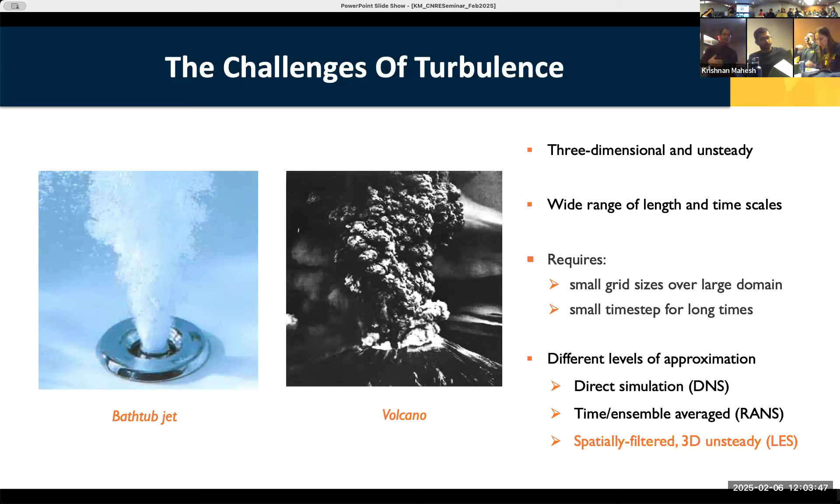Now, as the flows become higher Reynolds numbers, that's not practical. And so there is the approach called RANS, where you try to solve for the time or ensemble averaged flow. And the issue with that is now you need to model the unsteady effects of the turbulence. There is an intermediate approach called large eddy simulation, where your spatial grid resolves the large energy containing motions and your calculation is unsteady, but then you have to model the smaller scales. And so LES is what we are developing for complex multi-physics flows.

So what do simulations enable? What is the sort of overall objective? In a nutshell, we hope that simulations become reliable enough that they enable us to go from model scale to full scale. What do we mean by that? Well, the classical approach in engineering is to perform small scale experiments, right? Say water tunnel experiments, whose results we then take and scale to full scale. Now, if you look in the marine domain, the largest water tunnel that we have, there is a big LCC in Memphis. It's an order of magnitude smaller than a full scale something in the ocean.

Scaling is challenging as the physics gets complicated. For example, cavitation, right? Where liquid becomes vapor. Cavitation starts from nuclei, which are submicron. And then you go all the way to bubbles, which are say tens to hundreds of microns, from your model experiments to full scale. Now, when you go from a bathtub or your water tunnel out to the ocean, the size of the bubbles remains the same. The nuclei remain the same, but everything else is scaled up, which makes scaling difficult.

And so the question we ask is, can simulations assist, complement, replace some of this testing? And if yes, can simulations help us develop improved scaling laws? And for this to happen, the simulations need to be reliable.

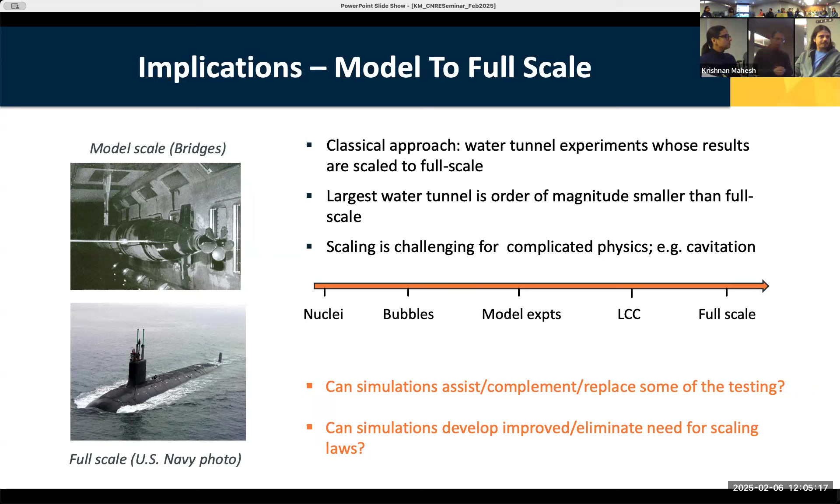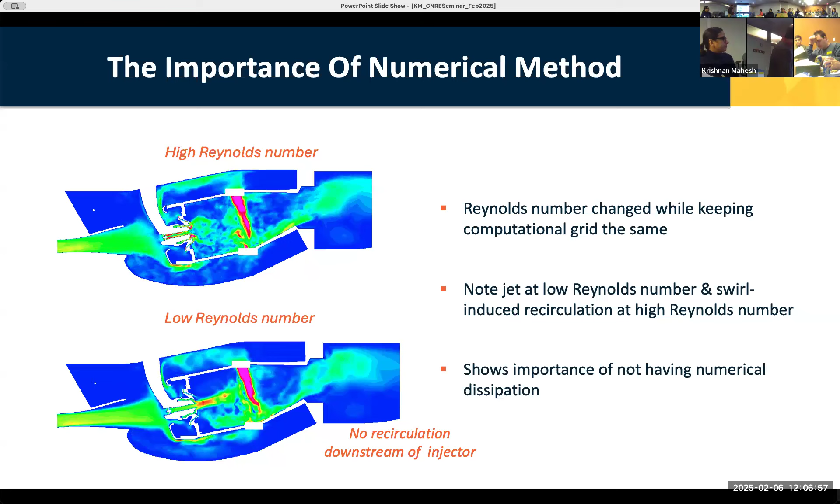Now, why make a production of this? So what is the point that we are making here? It is that at high Reynolds numbers on coarse grids, simulations can become unstable if the numerics are improper. And like I said, one might stabilize them by introducing numerical stabilization, but that can affect the result. So if you don't have dissipation, you become unstable. If you introduce it, the result changes. What then do you do?

So one way to address that problem is by developing methods which have the proper nonlinear properties. For incompressible flow, one such property is what's called discrete kinetic energy conservation. So what is meant by that is the following. If you took an incompressible flow, you conserve mass and you conserve momentum. The two automatically imply that you also conserve kinetic energy in the inviscid limit. And it's chain rule that gives you that property. But the thing is, discrete operators, numerical methods don't satisfy chain rule. So conserving mass and momentum doesn't automatically imply you conserve that.

Now, why is conserving kinetic energy important? Well, it's a quadratic quantity. So if you conserve that, then the stability of your solution is determined by what you do at the boundaries, which is something that you impose. And so the essence of it is, some years ago, we developed a numerical method that has that property of the governing equations on unstructured grids, which allow complex geometries to be represented. So that's been hugely enabling for us.

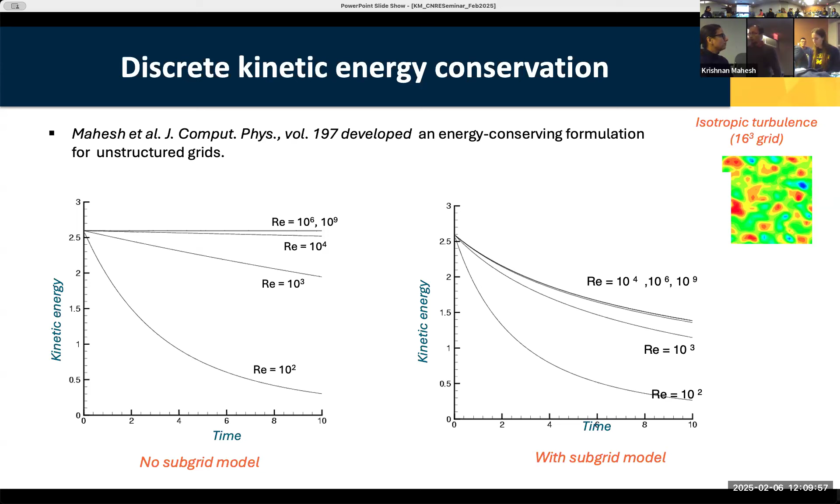So here on the same grid, you're turning on your model, and you see how the decay rate goes up, especially at the high Reynolds numbers. So your solution is seeing the effect of the model. And that's what you want. You want Reynolds number sensitivity, you want the solution to be sensitive to the model. If instead you have some numerical dissipation, then the solution will decay at a rate determined by the numerics and not the model. So this is what you get.

Now, why do you care about this problem? You care about it because when the vortex is stretched, the pressure in that core really drops. And when the pressure drops, that causes cavitation to incept. And that's what you care to predict. And so the implication is, when you try to do this problem, if your mesh is not fine enough to resolve that vortex core when it's being stretched, your solution is going to say, hey, there's no cavitation occurring here.

Well, the experiment is telling you, no, there is. So this is a scenario where the important thing, the thing you really care about, is happening at very, very small scales that become impractical to resolve even with a numerical method that you like. And so your solution strategy has to be one of modeling that subgrid scale, low pressure events that trigger inception. And I'll touch upon that later. So these are sort of the three main points that I wanted to make here.

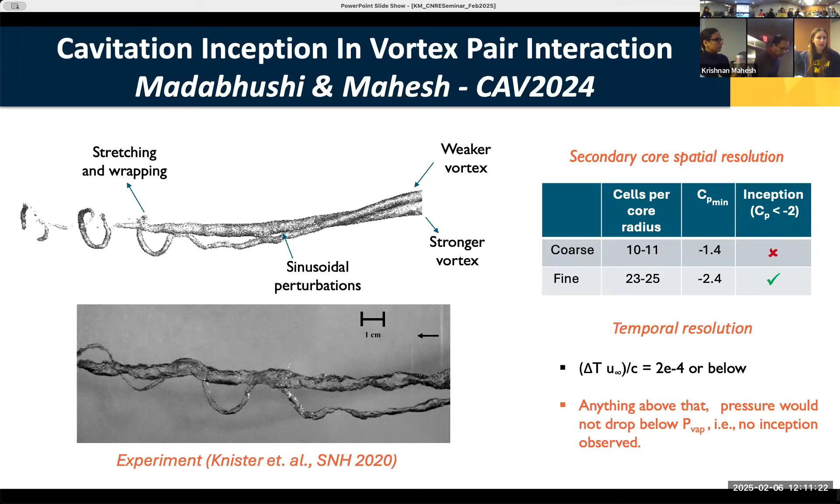We are interested in solving flow over things that move. And so we've developed in recent times, these two papers here describe the details, a methodology for moving bodies, multiple moving bodies. It's called unstructured overset. Unstructured allows you to do complex geometries. Your elements can be arbitrary. And overset refers to basically solving for the flow on a number of meshes that can move.

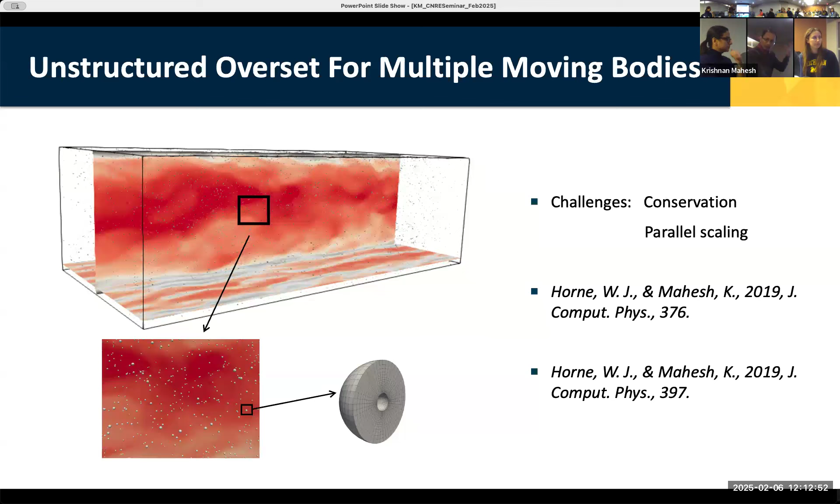And the significant challenges there have to do with numerical conservation. How do you conserve mass, momentum, have these energy conserving properties on all these different grids? And the second is parallel scaling. As the number of meshes and so on increases, are you effectively making use of multiple processors? And so these techniques had to be developed, and solutions are developed in those two papers, using ideas drawn from things ranging from techniques used in video games, for example, to handle how things are cut and so on. And that resulted in this methodology. And so in today's talk, I'll show you some results from this sort of a capability.

You saw many particles. I just wanted to show you one example that illustrates the detail that Wyatt paid attention to in developing this capability. So this is an example where you have one particle. It's dropping, and then you see it rebound from the bottom wall. You can imagine, right? If I just took a particle and dropped it on the wall, the pressure is going to increase beneath it. It's going to squeeze fluid out, and that's going to slow it down, then it's going to impact, and then keep bouncing. And because there's viscosity there, you're going to have a restitution. Every successive bounce is going to be smaller.

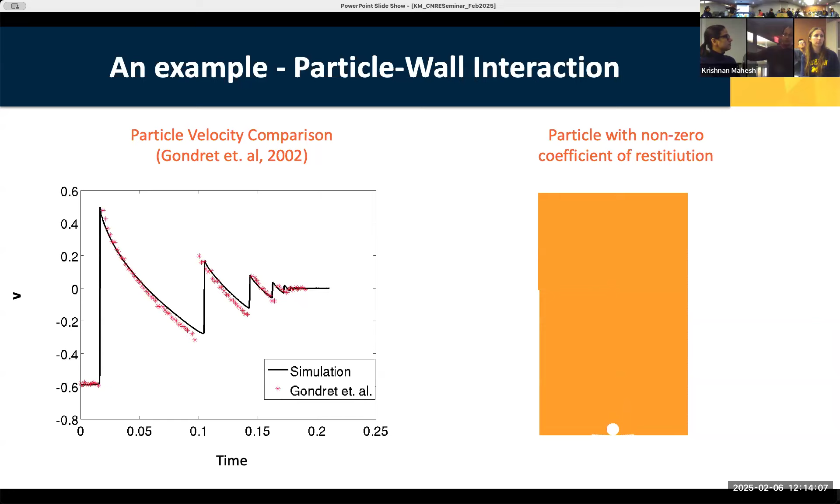Now on this body, you see this little line here. Zoom in. This is what it is. It's a tripwire. Tripwires are used in experiments to try and get the flow to go turbulent, so that the flow is representative of what happens at higher Reynolds numbers. It's been known that tripwires can affect the flow, and depending on the range, it's not always clear what they're doing to the flow. Now we are in a position to resolve the tripwire using the computational grid, and eliminate it as a source of uncertainty when we compare and when we scale our results. And that really is what is shown here.

This here shows you one comparison of the results. These two papers by Nick describe these results, describe the simulations. It just shows you how the pressure along the hull between simulation and experiment matches. And so what are these results good for?

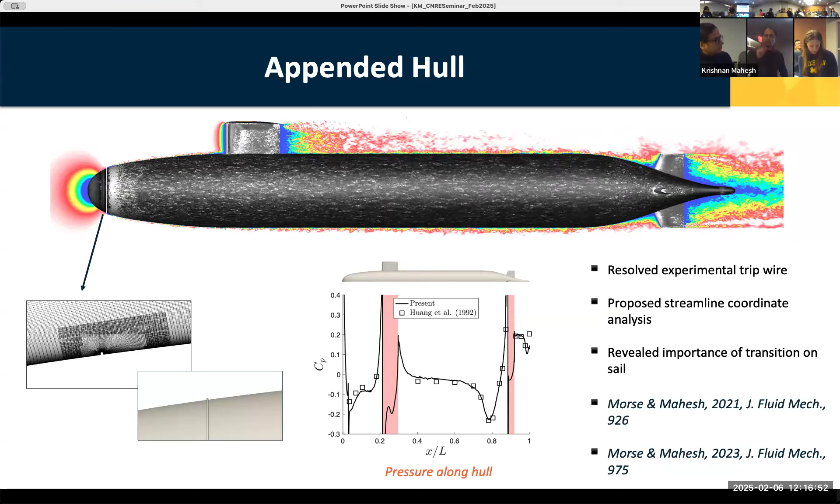Another thing I draw your attention to is you see the flow on the sail looks like it's going from laminar to turbulent. That's transition on the sail. And one of the things we learned here is that transition on the sail is important. I just wanted to show you that one result here. The experiments that we were comparing to had a bunch of pressure taps on the sail. That's what the P1, P2 is, right? And so we compared our results to the experiment at each of those taps.

So if you look at any one figure like this, this is the pressure, Cp as a function of x over c along this purple line. The experiments are the symbols. The solid line is us, where we just computed the flow. And the dashed red line is us, where we tripped the solution on the appendages as done experimentally. Now, this is one station; I'll show you a second and then some more.

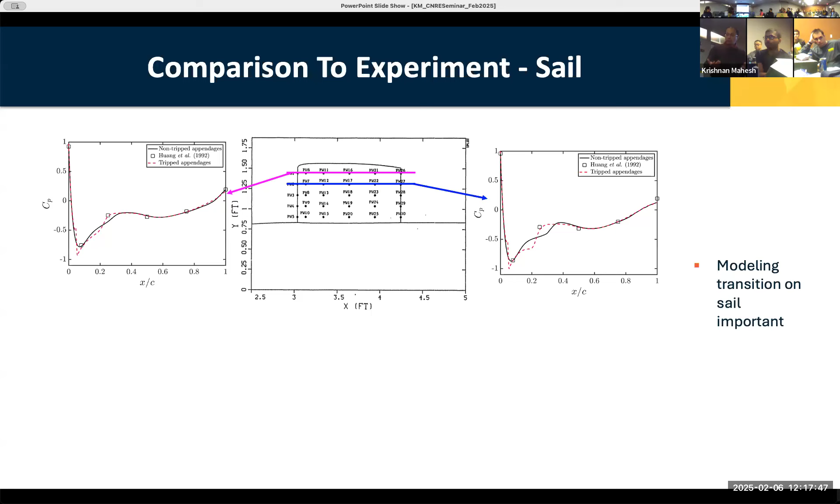When you first got these results, it was tempting to say, that's good enough. But then you look at all the stations, look at the third, look at the fourth. It looks like there is something systemic in terms of the deviation. And what we found is that when we trip the flow, the pressure goes basically through that tap, not just at one station, but throughout.

So tripping on the sail is important. And the reason is the sail is smaller. So even though the Reynolds number based on length is larger, the Reynolds number is lower. And so you expect that sort of a thing. So these are the sorts of things that we can now do.

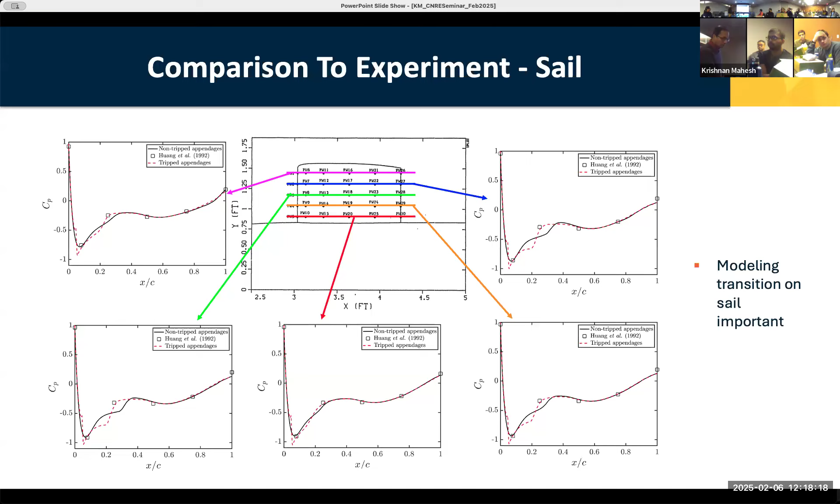I wanted to show you a couple of results on the application of this capability to what's called a prolate spheroid. It's a model for the hull of the body. Right now there's a big experiment being planned that Ellie knows a lot about. Anyone who's interested, talk to her about the experiments. They're really cool experiments of a really large spheroid that's going to be tested in the LCC. And the instrumentation on it is really wild.

And so LES is at a point where it's considered reliable enough to work with the experimentalists in the planning of things. LES was used to inform trip design in these HIPRO experiments: how do we trip the flow at angle of attack, and so on and so forth. Now, while that was going on, in parallel, we were performing simulations of experiments that were done much earlier in the Simpson group.

And these are results from those simulations. A couple of things that I wanted to point out. You see what looks like a ring here? It's actually 238 posts that those experiments had used. And because of the overset approach, we are able to attach grids to each of those posts and just resolve the flow. So if you don't agree with the experiment, at least it's not because you didn't resolve the tripping geometry.

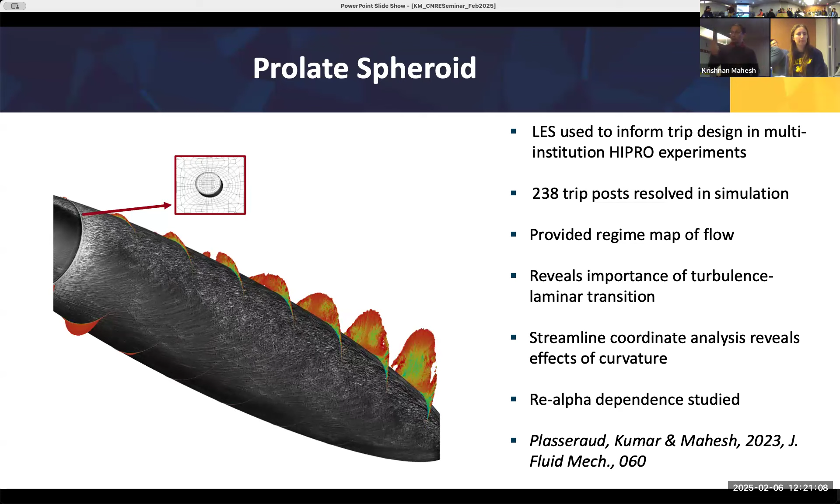And again, this was another problem. Again, look at it in streamline coordinates, seems more intuitive, easier to think about. And we looked at the span of the effect of Reynolds number and angle of attack. This is at 20 degrees. We varied the angle of attack to say, hey, how does the flow change? For the same angle of attack, we vary the Reynolds number. How do things change? And the flow is amazingly rich. And I just want to share a couple of results with you on that.

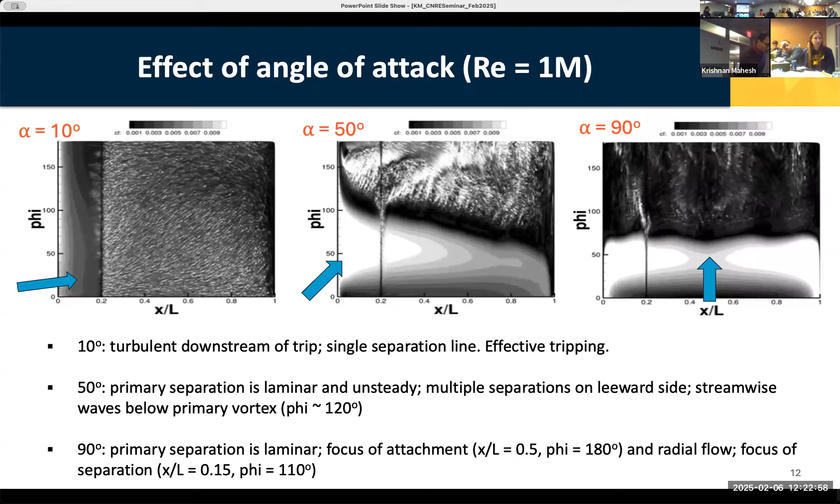So why these things happen is a source of huge interest to us. How does a transition occur from one regime to another? Are there regimes? There are experiments that show when you have those big vortices on either side, they can be asymmetric. So they form on one side and then they just want to stay on one side. And that's a huge deal, right?

You can imagine if you make a big vortex to one side, your loads are all pushing in one direction. That's a problem. Why does it happen? When does it happen? Why do these waves form? Can we take this data? Can we take measurements away from the wall and assimilate, predict what's happening near it?

And then think about future pressure fluctuations, right? What is their nature? Skin friction, what is their nature? What are materials of the surface? What are they going to look like? And we do little things near the separation points and so on to change the topology of the flow. So thinking of all of these things in the context of this flow is how we're thinking about it.

And this thing is stationary. You don't just stand still in the ocean, you move. So once you start moving, now you have unsteadiness in the mean, and that changes everything, right? Even more. So that's the richness of this problem that we're hoping to look at down the road here.

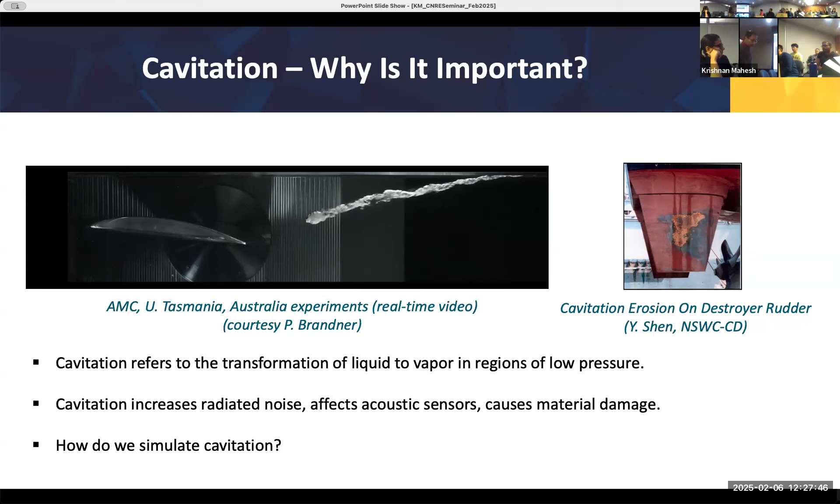Imagine this happening behind a propeller when you're underwater. Something you would not like to happen. Now, when the cavitation is large, it can cause coatings and so on to erode. That's what's happening on the right-hand side. So these are the two reasons to care about it. So the question is, can we simulate cavitation and use it to predict and hopefully control or design for these things? I want to share a couple of examples in both the inception and erosion regimes. The first has to do with cavitation inception in ducted propulsors.

Okay. Now, what you care about in this problem is inception in these ducted propulsors. At what free stream pressure do you start hearing noise? Does inception occur? That's the engineering problem. And there's past experimental work on this which shows, as known from experiments and propeller designers, that the tip vortex is weaker in ducted propulsors compared to the open prop.

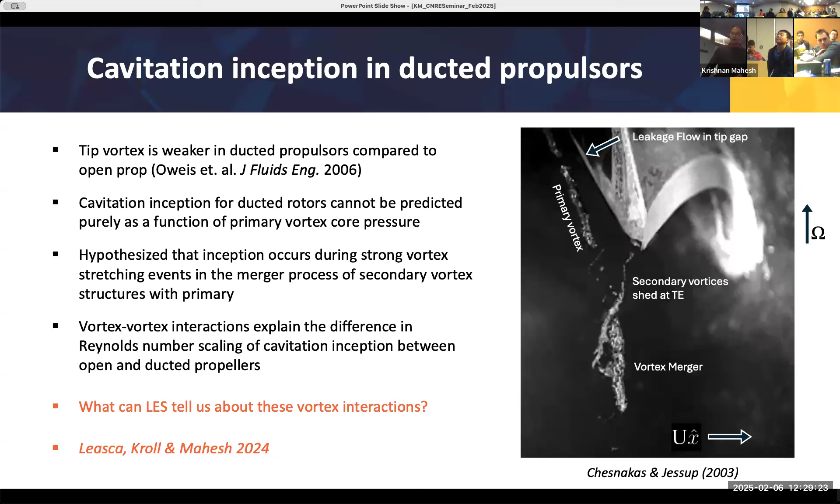And furthermore, when it comes to predicting inception in these ducted propulsors, the inception is due to the interaction between these vortices, and cannot just be predicted in terms of the strength of the primary vortex. So the question is, can we get these interactions right to get the scaling right from small model to full scale? And the question we ask is, can LES predict this problem? And if so, can it guide us towards predicting scaling of inception of this problem?

And so the first is that LES provides some insight into the tip gap details. One of those insights is that the interaction isn't just between one primary vortex and one trailing edge vortex. Instead, the blade sheds vorticity through a number of fine scale, counter-rotating vortices that interact with the primary vortex.

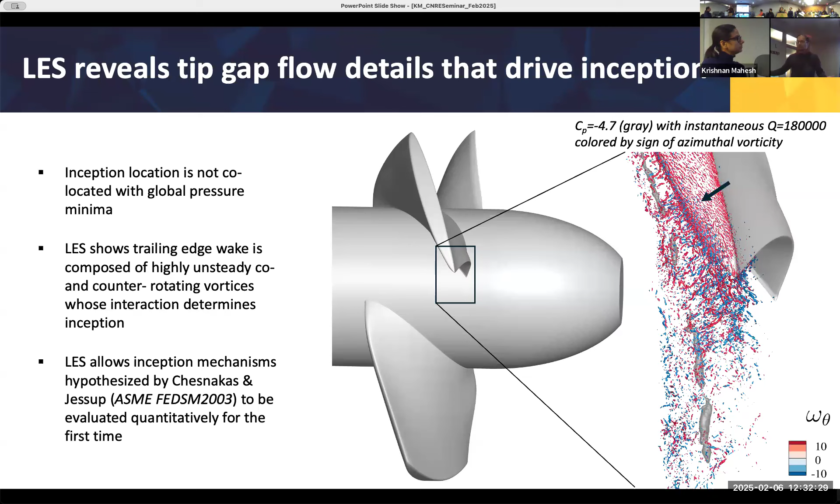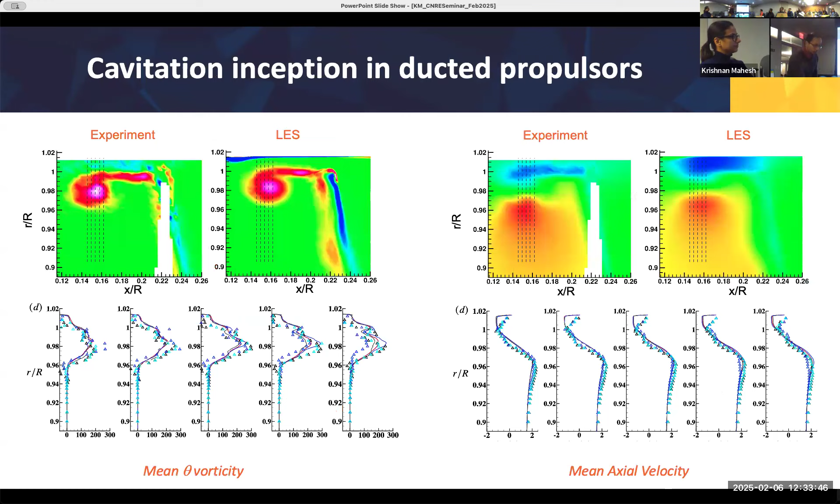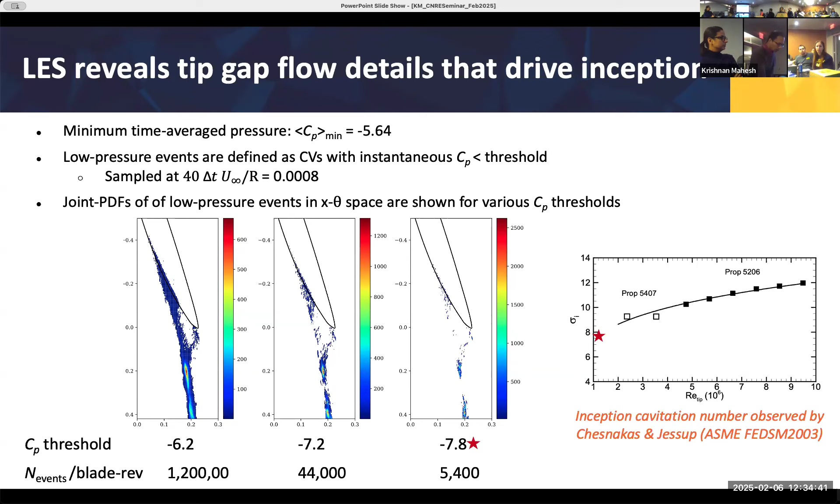Okay. Now, we said earlier that when you have cavitation occurring, it occurs in small regions for very small instances of time. And if your mesh isn't fine enough to resolve those small regions, you're not going to get the pressures that are low enough for cavitation to occur. What do you do? Now you've got to model explicitly the subgrid scale low pressure events such that you get cavitation. And so that's work that we're doing.

And I'll show you results in the context of a problem which has been experimentally studied here at Michigan, where you have two hydrofoils that produce these stiff vortices that interact, right? And in the region of interaction where the weaker one is really stretched, that's where your pressure is lowest. And you'd like to compute this flow. So imagine trying to compute this. How might you do it?

You go, oh, the experiment shows me inception. I'm not seeing it. Well, I'll keep refining my mesh till I see it. We did that, right? Then you go, okay, now I get it. I agree with the experiment. But now I'd like to compute it on meshes that are maybe 10 times smaller, 20 times smaller. How do I do it? How do I model it? That's exactly what we've done.

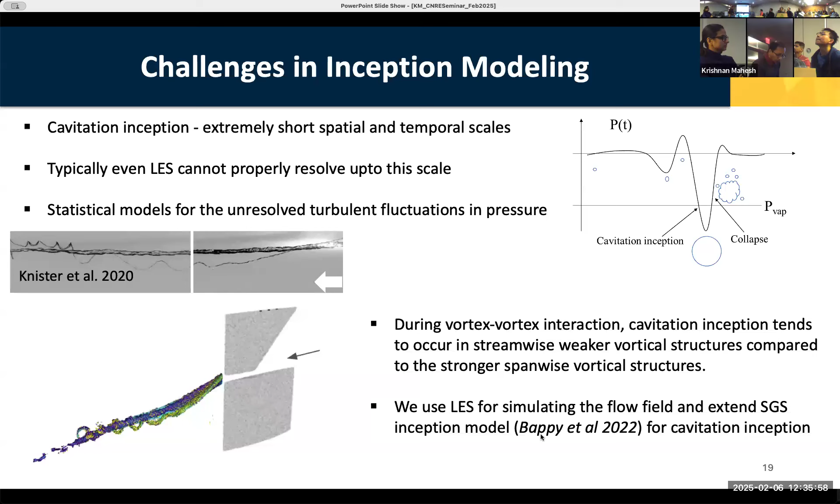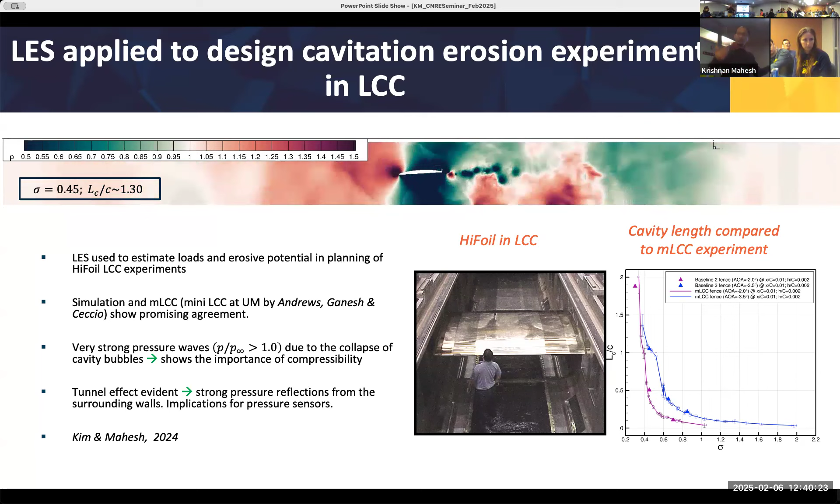Now, these experiments don't have volume fraction measurements right now. So to get further insight into this regime of the flow, we said, okay, let's look at a hydrofoil configuration for which there is more detailed data, things done on a smaller scale, because the LCC is large, you can't do all these experiments. And so there were experiments done here

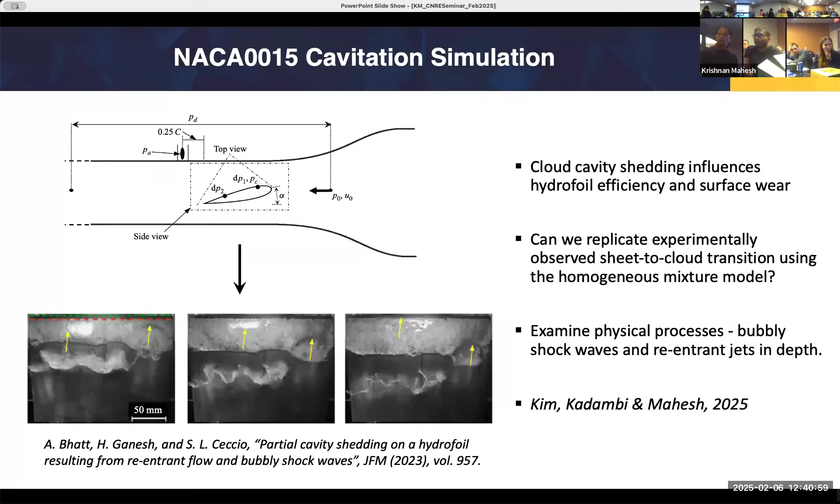in Michigan, where they looked at a NACA 0015 and got it to go into this very erosive regime. Can we predict it? What do we get? What do we understand? So Sungnam is doing that sort of work. And so I'll show you results at an angle of attack of 10 degrees. Imagine dropping the free stream pressure at a 10-degree foil for the NACA 0015 in the same conditions as this experiment.

So this is now a higher pressure, sigma is 2.6, just think of it that way. The white that you're looking at is an isocontour of vapor. The more white you have, the larger the regions covered by vapor. So you see a sheet of vapor form near the leading edge on the suction side, the suction peak, right? And then it rolls up into a cloud and then collapses. On the vertical plane, you have pressure, and again, you see its intensity, right?

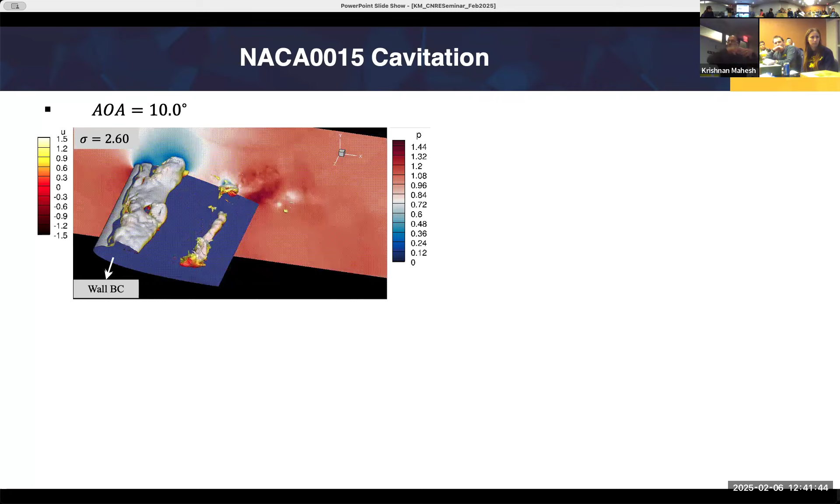As small pockets form and larger small pockets form and collapse and so on and so forth. Here is what happens when you drop the pressure. The region of vapor increases. Drop it some more, region of vapor increases some more, right? So the cavity length effectively increases.

Now, what you can do is to time average your vapor volume fraction, and from it extract a cavity length, right? That's what's done here. And then we compare our cavity length to what was measured in that experiment. The crosses are the LES results as they stand. The statistics are still being gathered. So these are results in progress, and it's encouraging.

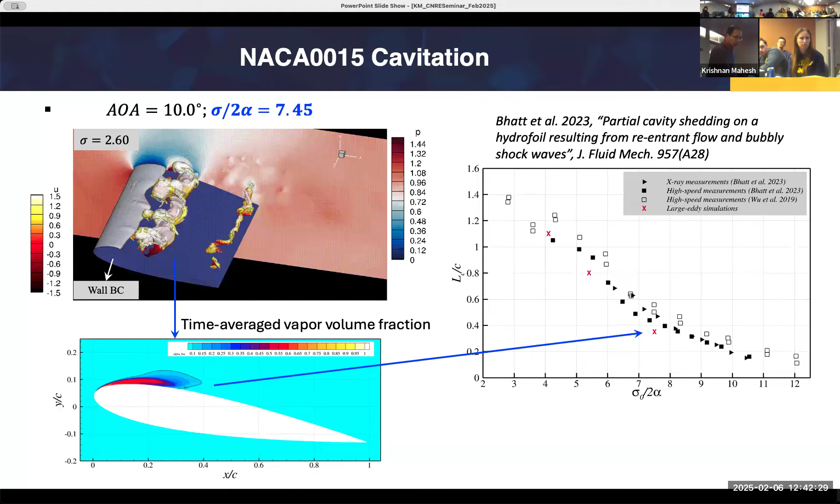Okay, the symbols in black are the experimental data, versus the crosses. The x-axis is pressure. Okay, and that's really what's shown here. The agreement of the three crosses with the data is, so cavity length seems to agree reasonably. And on this slide, I want to say, okay, what is the LES good for? What does it provide? Okay, you agree for cavity length, what does it give you?

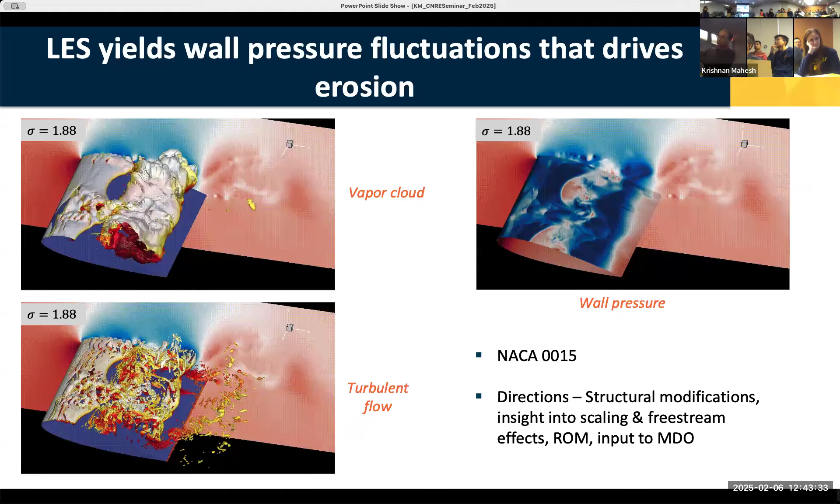And the figure on the right is really what is useful information, because it gives you wall pressure on the surface of the airfoil. Because if you have this data and if it's reliable, then you can use this. This feeds into trying and predicting the pitting, right? Because this is the forcing function for the structural damage. So that takes us into those future directions down the road. So that's the reason for doing these things.

And so it raises this thing, is it there? It raises the interesting possibility that there are higher tones also. But so far, the agreement for what we are comparing and what's available is encouraging. And this is where we are in the process, okay?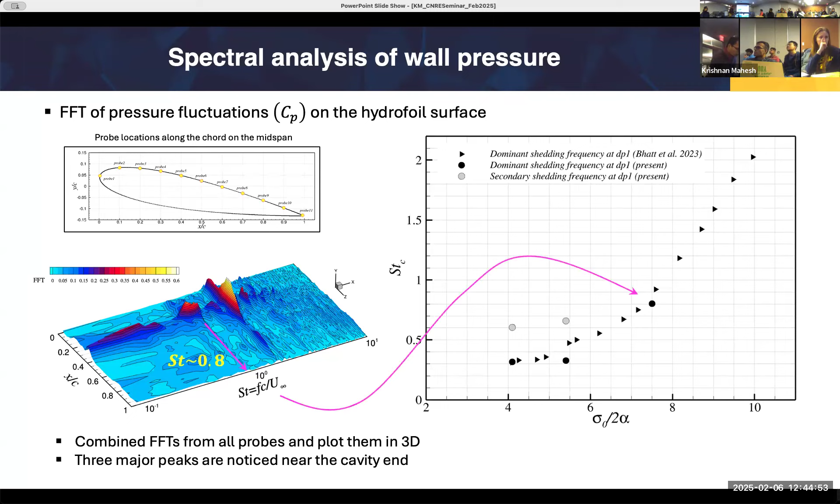That is, if you had water going over a surface like this, now instead of water being in contact with the surface, you have air, right? You have gas in contact. So can the drag go down? That's the promise of it. And so what we've developed in our group is the following. Given a realistic superhydrophobic surface, if you can scan it and give us that geometry, we can, using free energy principles, calculate the shape of that complicated interface. That was done in this paper by Kareem and company.

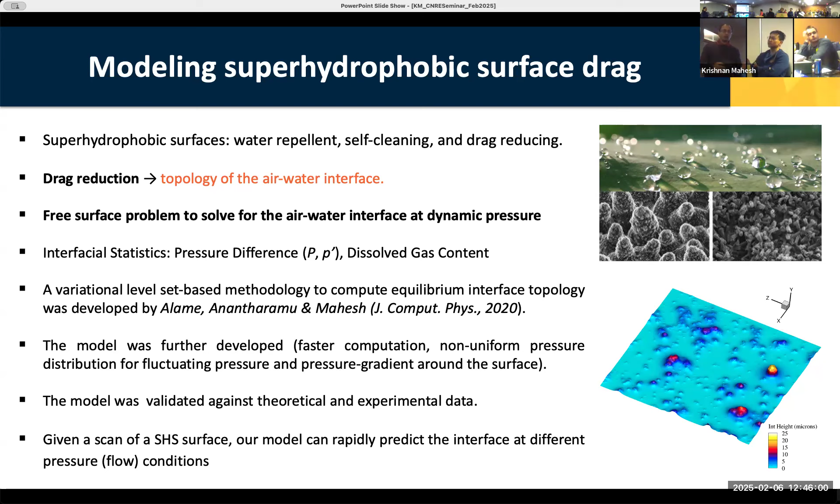And we've recently extended that capability to say, if I now know the shape of that interface, can I model the drag that surface would cause, right? And Mehdi has done that. And I wanted to show you one slide on that. And here is the insight that came out of that work, which is that current literature, when it says how do superhydrophobics work, they try to correlate drag reduction to one parameter.

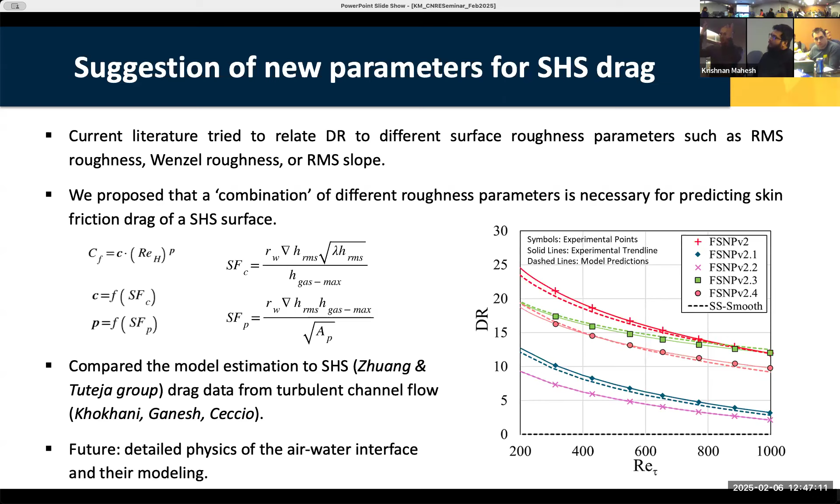So the future thing is, if I now zoom right to the surface, what are the turbulent details of the flow that happen near the surface? That's the direction that we're thinking. So superhydrophobic surfaces are one example of next generation surfaces, as we want to call them.

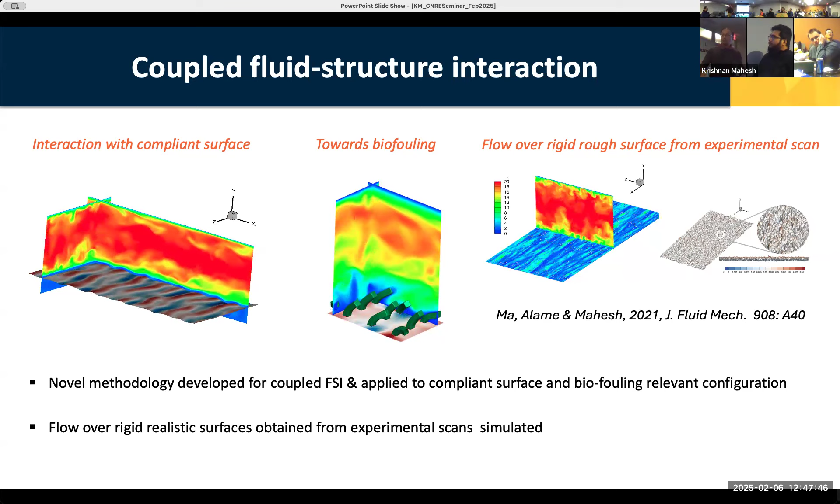But another example of dynamic surfaces that we care about has to do with biofouling. We are working on developing the capability to do coupled fluid structure interaction to understand things like compliant surfaces, coatings and other things that are compliant and relevant to biofouling. You have things that grow on a surface. They're soft, they respond to the flow, the flow affects them, they affect the flow. And how do you develop methods to predict these things?

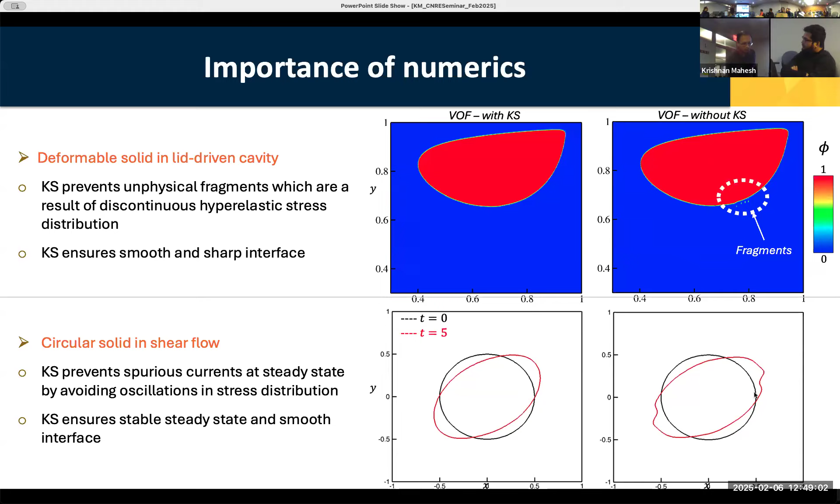And the thing on the bottom is just a circle. You're shearing it, it becomes an ellipse. Numerics are the difference between getting an ellipse and getting something that looks like that, on the right. So I just wanted to share this with you, and show you a couple of results.

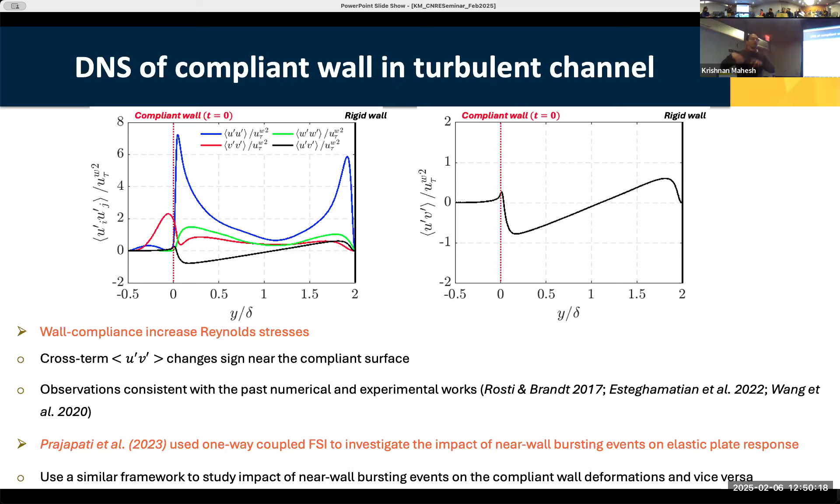So what do you do with this? We can now ask questions like, how does the structure of the flow affect the near wall perturbation in a dynamic sense as a function of frequency, and how does that affect sound? We've developed that way of analysis for one-way coupled things, and so now the idea is to go forward and answer questions like that in this two-way coupled framework. So I just wanted to share that as an example.

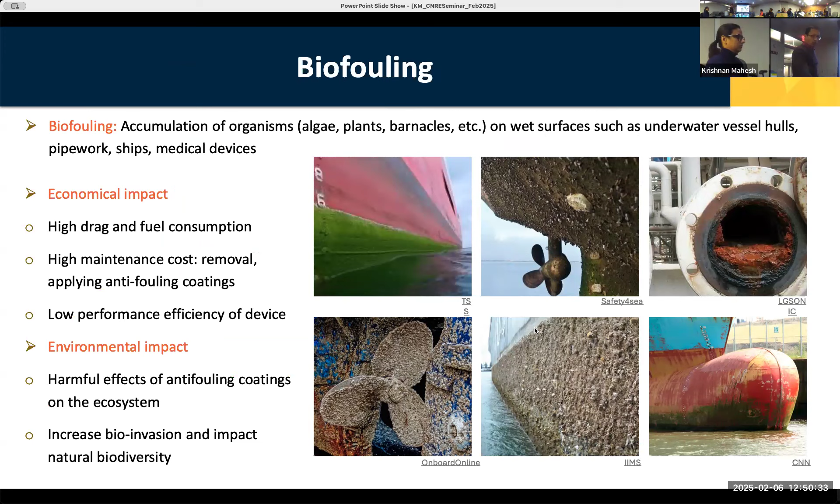And then biofouling, as I said, is another problem that we're actively working on. There's work going on in Harish Ganesh's group, so we are aligning with that. And the idea is the following: to use numerical tools to look at the dynamic interaction of biofouling, right? That's from Parth and Harish's experiments, and allow us to answer questions like these.

How do element shape, material properties, distribution density affect how they interact, how do we model it more accurately? How does a substrate on which these things grow affect the interaction, and how does all of this impact drag and so on, right? And simulations like this, I just want to leave you with that. If simulations like this are reliable, you have information on things like near-wall pressure and vorticity and so on and so forth.

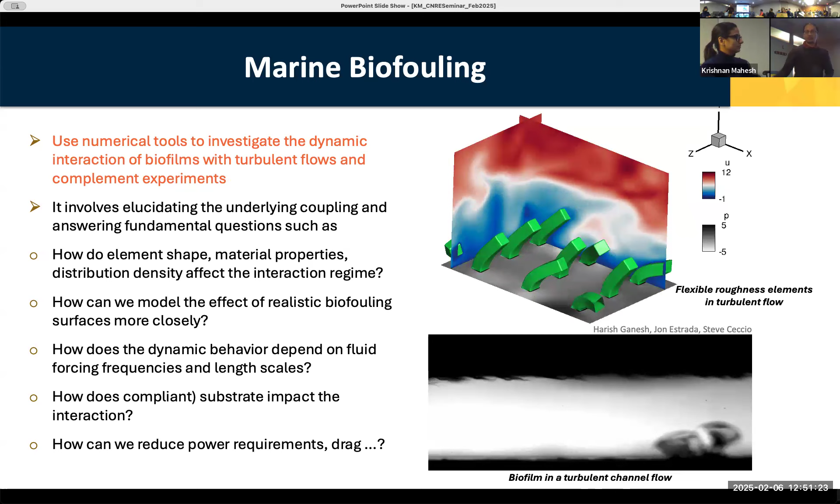Right. The key question is, well, can you believe what you're computing is the thing? And so that's the development aspect of things. But the potential of it is significant as we move forward. And this is the last part of my talk. So you perform simulations, you have experiments. We talked about how you collaborate, right, and assist each other.

Now, another way in which you can integrate them is, can you integrate simulation data with experimental data? Why would you want to do that? Well, one possibility is use the experimental data to improve your predictions in real time. The other possibility is use the simulation data to predict things that the experiments that you have are not predicting. For example, something right now that is of interest to us.

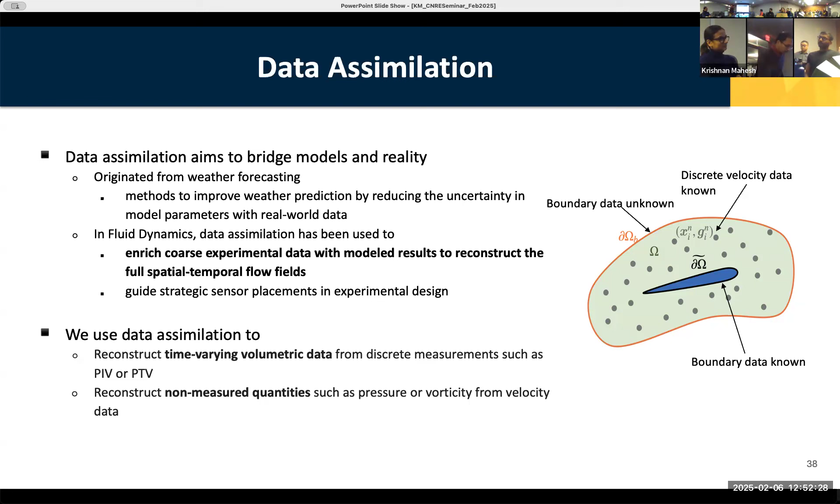We're exploring two approaches. One is what's called an adjoint approach that Gary is working on. And essentially what you do is the following. You solve a gradient-based optimization problem. So we all know least squares fitting, right? If you have data, you can fit a curve. Okay, so imagine having the experimental data here. So the actual values of velocity, whatever is being measured, is one constraint. You would like whatever you're fitting to be close to it.

But whatever you're fitting should also satisfy the Navier-Stokes equations. So they act as constraints. So you want to combine everything and obtain a continuous field on your numerical grid that satisfies those two constraints, right? That's the essence of it. And it's a lot easier to say it than it is to do it. So what we are optimizing is, if I have this data, what are the values of the boundary? What are the initial conditions that give that prediction correctly? That involves adjoints. There's a cost in terms of how you do it and so on and so forth.

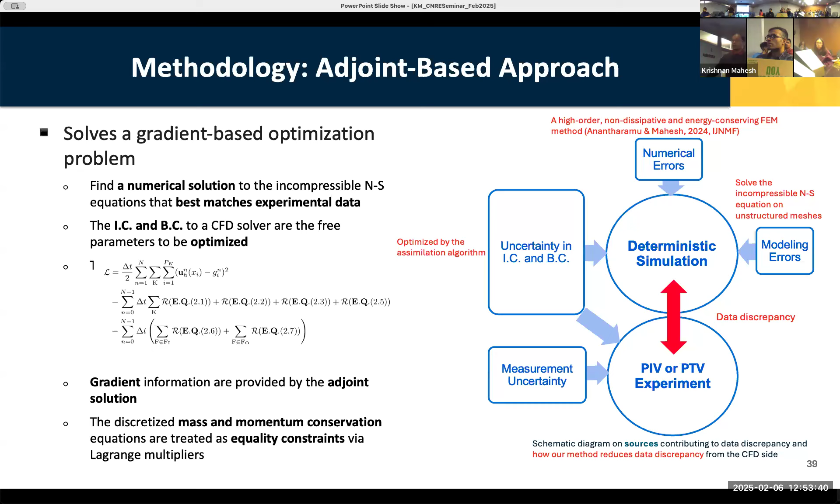So right now, Gary's developed the approach, the algorithm to do it, and we are developing the codes to scale it up to larger problems. So then we would have a method to work with PTV data that gives you pressure, vorticity, and so on from the data. And Shenzhang is exploring PINNs, or machine learning, to do the same thing. In the PINNs approach, again, you have the data and you have some physical constraints that come from your model. You don't solve an adjoint problem, but through a process of training, you get the predicted data to match what is given, and that becomes your model, right?

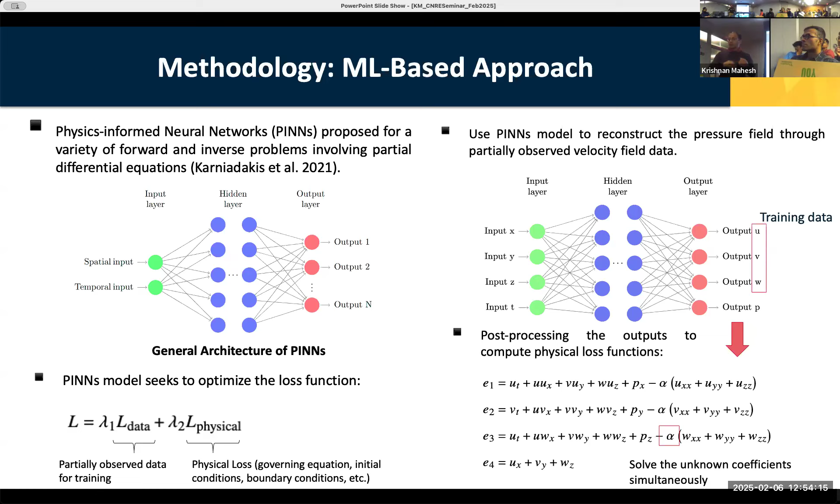So how does it work compared to adjoint? Is there a hybrid that's possible that makes things better? That's what we'd like to explore. Those are the research questions for us in the context of this problem. So just to show you a couple of results in the adjoint-based approach.

This is a field of turbulence. That red square is where you're extracting data. The blue are the points where you're extracting data. On the bottom, your assimilation approach is recreating data in that subvolume. So whatever is inside the red on the bottom should look like the red on the top, essentially. Okay, and the machinery that we have allows us to calculate things like the error and so on and so forth.

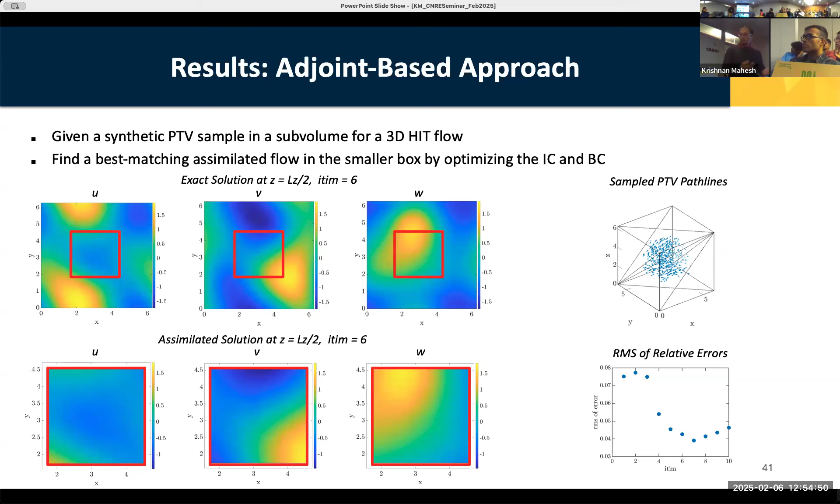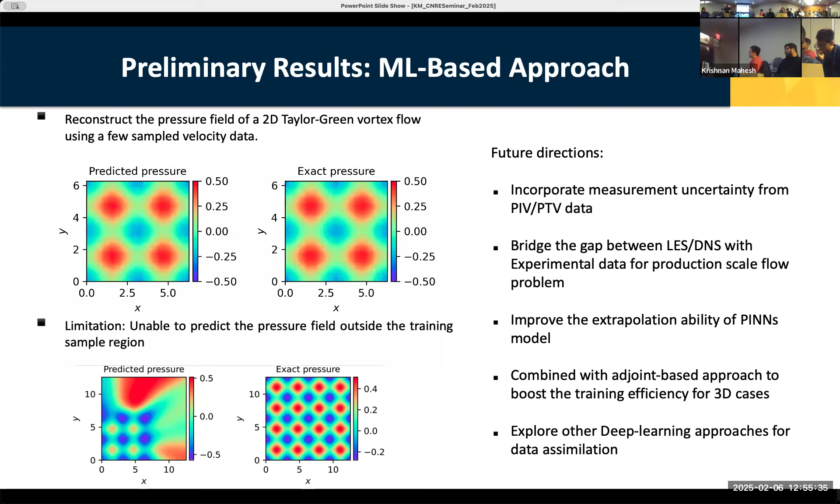Now we are trying to push it to understand its limitations, which is going outside the range that you have. One way to think of it is in parameter space, but you can also think in terms of spatial location, right? You trained on a sub-volume, you try to predict a larger volume, you don't get it right. And so future directions are to understand and develop both adjoint and machine learning approaches to develop that kind of framework where our nature of interaction with experiments is.

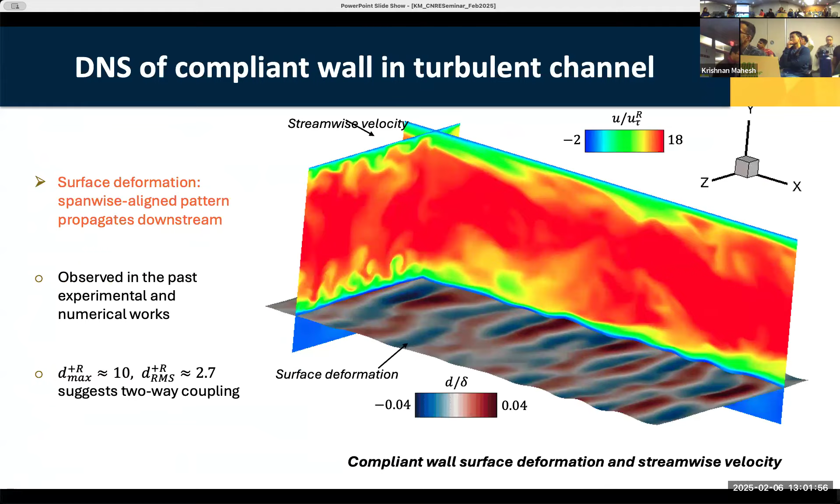So he tracked that and got the frequency at which a bubble of initial size R naught incepts, something like this. He represented it as a function of the initial size, the absolute pressure the bubble sees, and the nature of the turbulence, which, since it was isotropic, was a Reynolds number and a dissipation rate. Applying that table to our flow involves the conceptual leap that inside every cell, since we're so coarse, those isotropic results, at least for the frequencies, are valid.

So in our LES, we solve a dynamic equation for the subgrid scale kinetic energy, and another dynamic equation for the bubble density as a function of size. Those go into the table we look up, which gives us a frequency that we plot. So it's simulating what the effects of the bubbles would be as well? Would it be two-way coupled? No. In fact, it's almost a post-processing step. You take the fluid flow and get these frequencies from a table. The intent is for it to be practical.

So you simulate these flows as incompressible. Now we have other work going on. Aditya has done work where it's compressible and coupled, with a large region of vapor and separate scale bubbles, and that's a separate direction that's evolving. But here all you want is: what is the free stream pressure at which I start making noise?